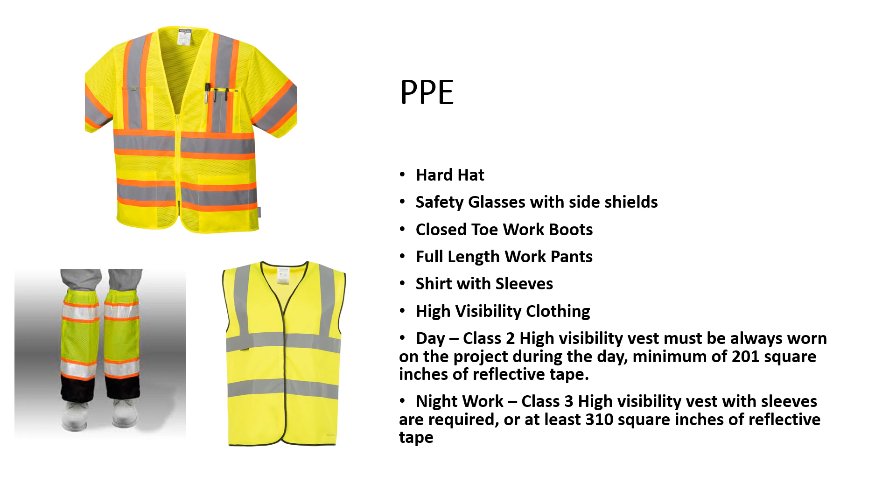The first topic we will be covering is PPE. It is expected that you're wearing a hard hat, safety glasses with side shields, closed-toed work boots, shirt with sleeves, and high visibility clothing. During the day, the requirement for high visibility vest is a Class 2 vest, and at night, it must be a Class 3 vest with sleeves.

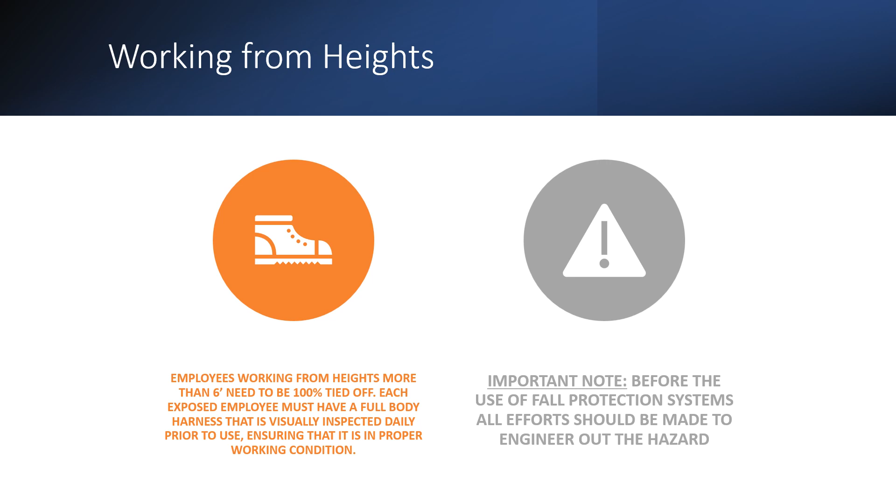Working from heights. When working from heights more than 6 feet, employees need to be 100% tied off. Each exposed employee must have a full body harness that is visually inspected daily prior to use, ensuring that it is in proper working condition. Before the use of fall protection systems, all efforts should be made to engineer out the hazard.

Ladder safety. Whenever possible, avoid working from ladders. Substitute a stable work platform or a scaffold that is fully decked with a complete guardrail system. Inspect each ladder prior to use. Always maintain 3 points of contact on the ladder. 3 points of contact can mean 2 feet and one hand on the ladder. Ladders must be at least 3 feet above the top platform and fixed to a stable surface.

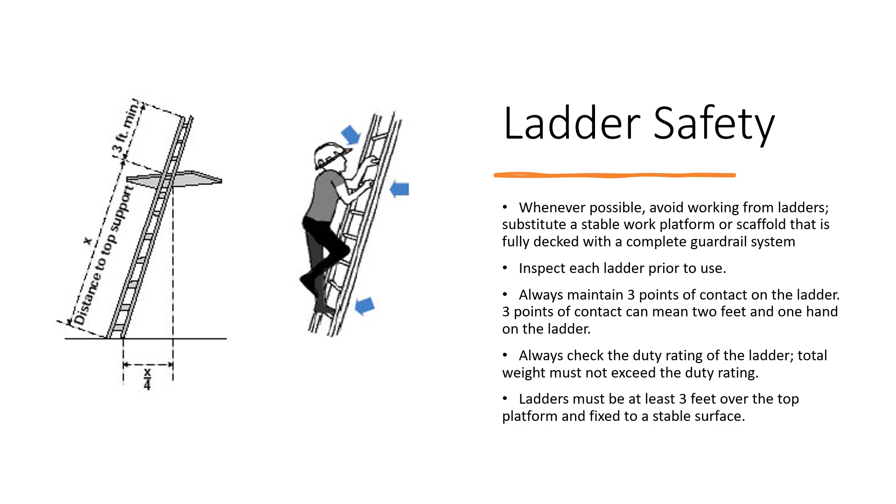Cutoff saw and grinders. When using a cutoff saw or a grinder, each piece of equipment must have all manufacturer's attachments on the equipment. A bionic face shield over safety glasses must be worn when either of these are in operation.

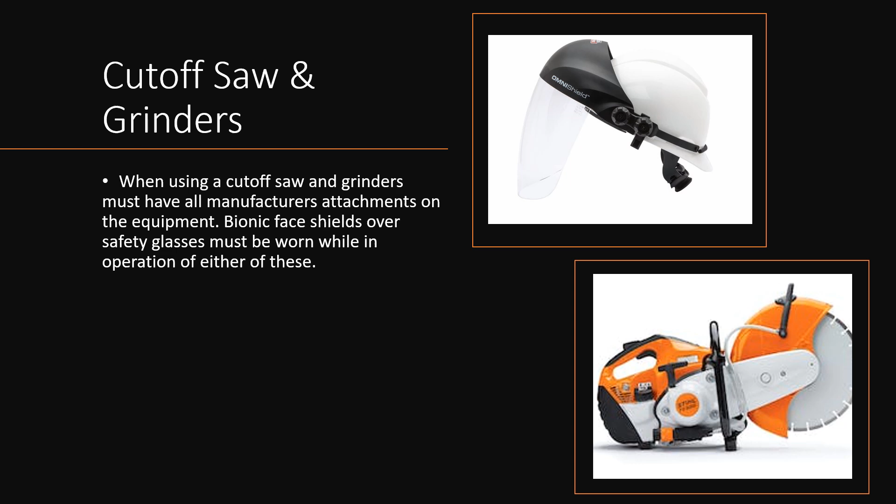Silica exposures. Any concrete dust exposure on the project must have engineering controls in place to minimize exposure. Examples: vacuum and water. Activities include machine demolition, jackhammering, saw cutting. KCI bases all silica standards off of Table 1.

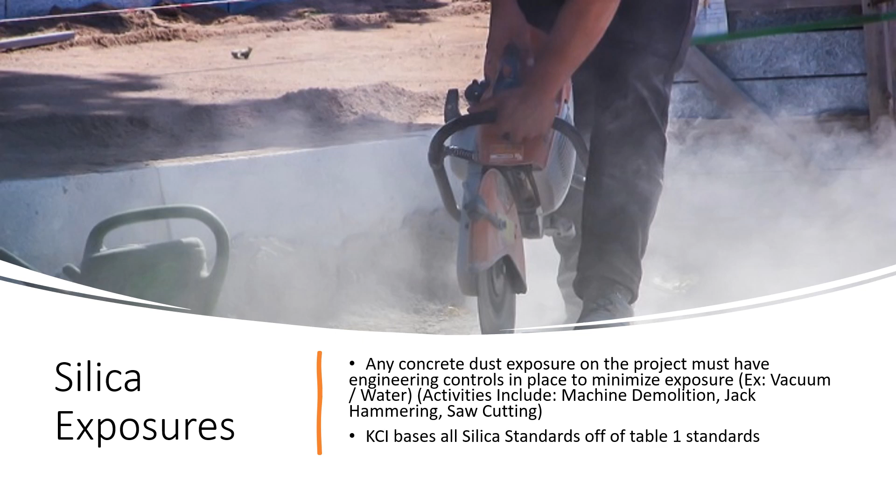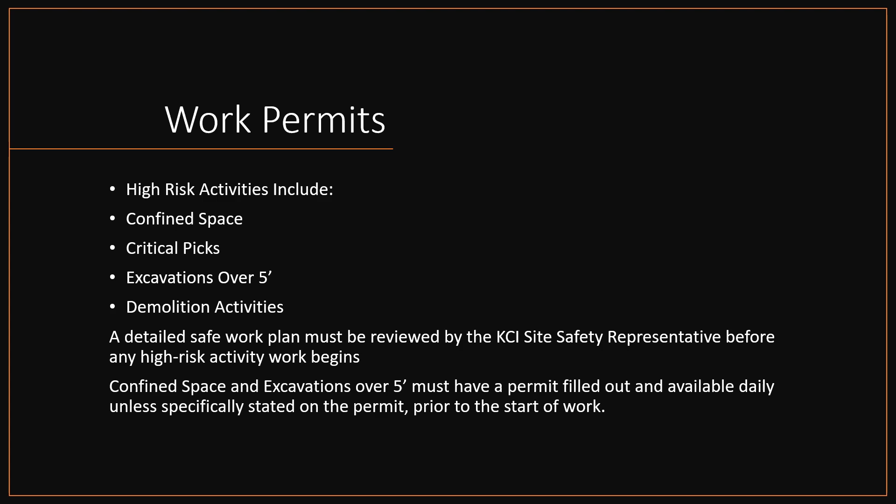Work permits. Permits must be filled out when performing a high-risk activity such as a confined space, critical pick, excavation over 5 feet, and any demolition activity. A detailed safe work plan must be reviewed and approved by the KCI site safety representative before any high-risk activity work begins. Confined space and excavations over 5 feet must have a permit filled out and available daily for review, unless specifically stated on the permit prior to starting work.

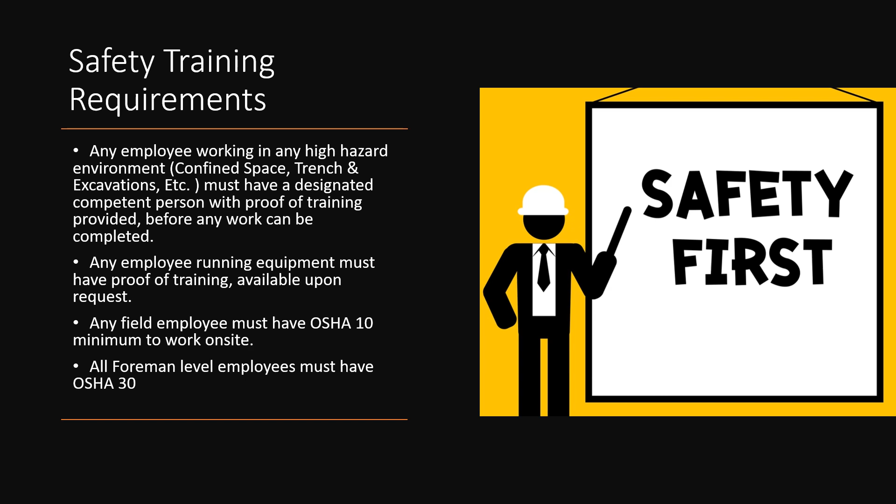Safety training requirements. Any employee working in a high hazard environment must have a designated competent person with proof of training provided before any work can be completed. Any employee running equipment must have proof of training available upon request. Any field employee must have an OSHA 10 minimum to work on site. All foreman level employees must have an OSHA 30 minimum.

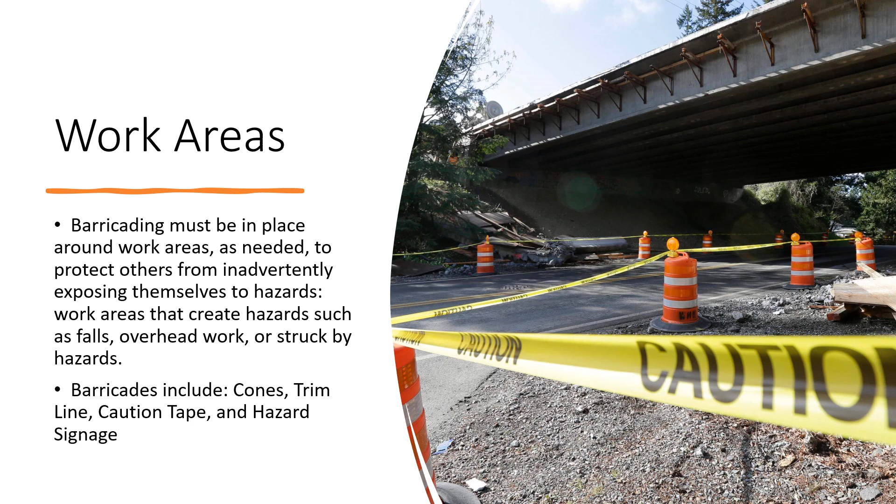Work areas. Barricading must be in place around work areas as needed to protect others from inadvertently exposing themselves to hazards. Work areas that create hazards such as falls, overhead work, or struck by hazards. These barricades include cones, trim lines, caution tape, and hazard signage.